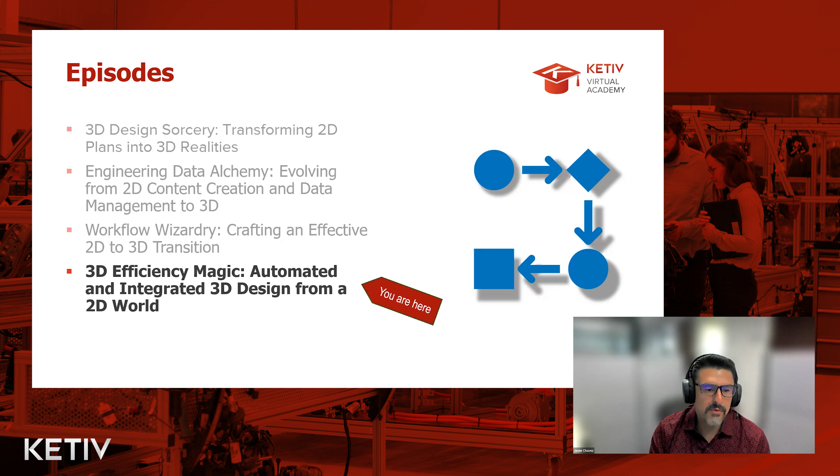So with that said, I'll just review a little bit of what we've covered. The first part was all preparation, a high level overview. In the second video, I think we talked about how you're going to go about planning and creating your content. In the third one that I delivered, I introduced you to some workflows on leveraging 2D data, as well as bringing in static 3D data from STEP files from other sources and making sure that they're usable. And we also talked about, if you do have to start from scratch, what are some resources to create models and 3D data from scratch.

So this last session, we want to make sure that we connect the dots and start to really leverage this, because honestly, the first 3 components of this are a huge investment in time to get up and running.

And you really want to see a return on that. And you can see a return on that, just by some of the information you can glean from a 3D model. But I think you can glean a lot more or get a lot more from this last component where we automate and integrate into other systems.

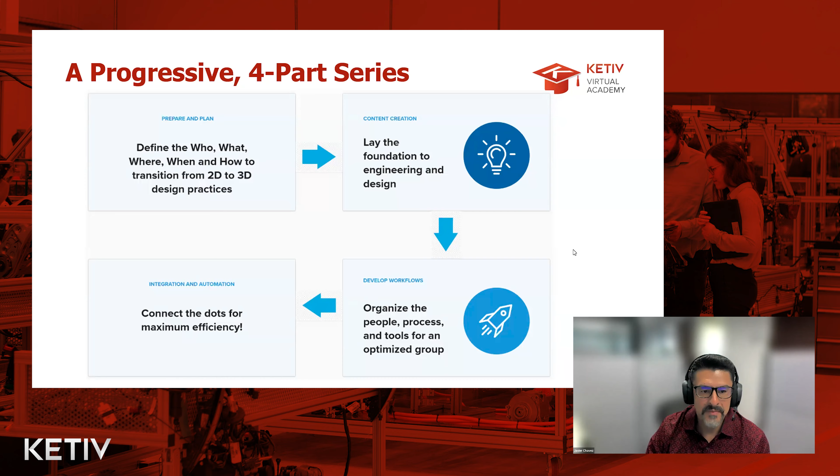So you can see the agenda here. We're going to start off talking about design automation. I want to bring up an example, and we're not going to go from beginning to end in terms of creating or programming any iLogic, et cetera. But I am going to give you some really good resources and give you a live demonstration on what that looks like. And of course, again, with those resources, you'll see how you can get started.

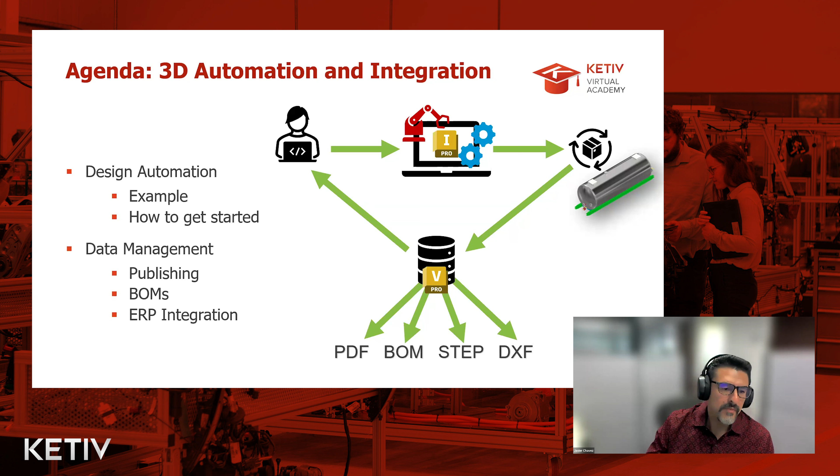But the other part of this is how 3D integrates, I think, better with data management. You can certainly work with data management in a 2D environment, but you can get so much more information and you can do a bit more with that 3D data than you can the 2D. Okay, so that's one of the reasons we go to it, so that we can manage our data better. And so with that said, let's get into our design automation example.

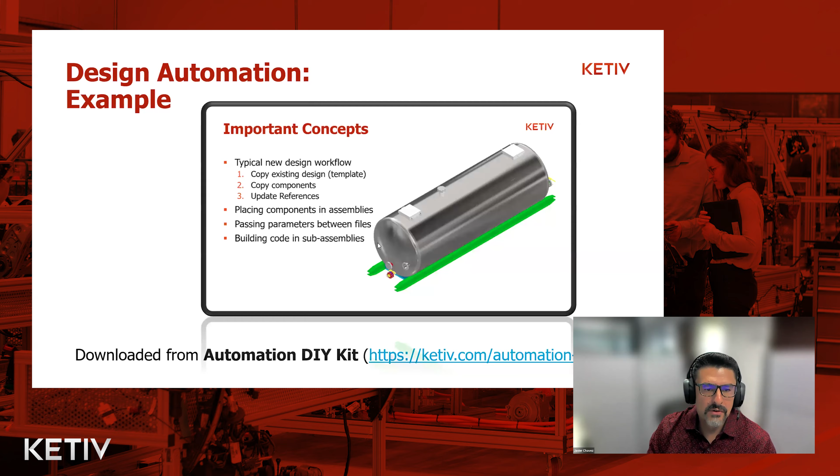So this is what you're going to see. And before we get into this design automation example, let's take a look at just some of the information in it, right? So in this case, we're doing an assembly only, right? And we want to create a new assembly. And the typical workflow that we're trying to automate is going through the process of having sort of a templatized tank here, right? There's a number of components present in this configuration,

but we also want to configure it in the process and borrow things that are standard, that are static, that don't change, maybe in a library folder, and then also copy components that are going to get changed, modified, lengthened. The diameters are going to change, or maybe they're simply going to be turned off. We want to copy those. And when we do that in an assembly, we want to update the reference so that we have one unique assembly with certain things that are standardized, that are borrowed and used over and over again, and other things that are changed, right? That are swapped out.

So it does cover these concepts that you see here. Passing information back and forth between the files through iLogic, as well as through Excel spreadsheets, and building code in subassemblies. That's what this data set covers. Again, we are not going to be able to go through every component of this, but we have some pre-recorded information that you can use, and it's got a ton of detail.

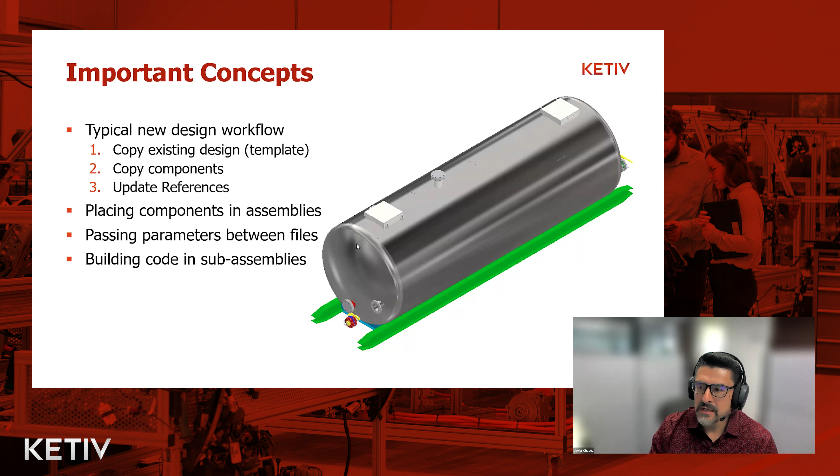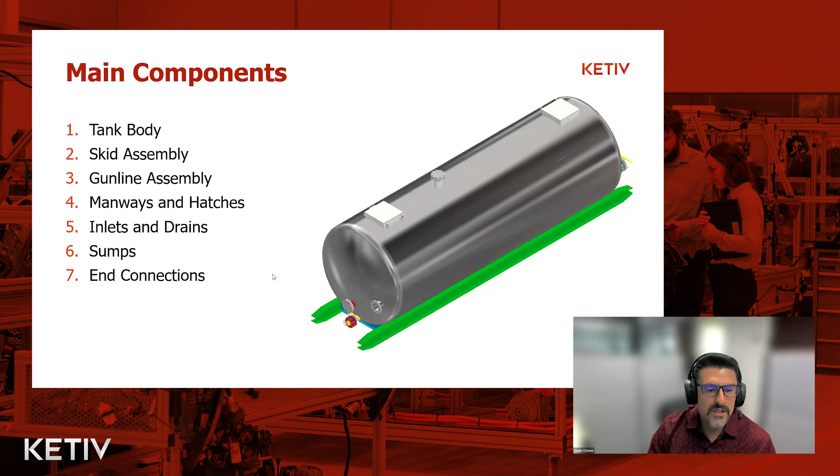So with that said, let's go ahead and take a peek at what this assembly is composed of. We've got a tank body, skid assembly. There's a number of components there. Each one of these has some unique variables or rules in regards to them, right? And again, we go into a bit more detail in some of the videos that we'll distribute out to you. But the tank body has two main components, like the ends or the heads, if you will, the dish heads, and the individual shell pieces that get copied along the length.

So there are individual shell pieces that get copied and welded together here. So there's a number of pieces there. And of course, we want to control the diameter of that. So we want to do this in 6-inch increments, and we want to also control the lengths in 6-inch increments all the way from 36 to 600. So what we've done here is we've captured the rules, right? The logic. So we're not just copying things like I maybe showed in the previous slide a moment ago. We're also adding logic to this. These are some of the rules just for the tank body.

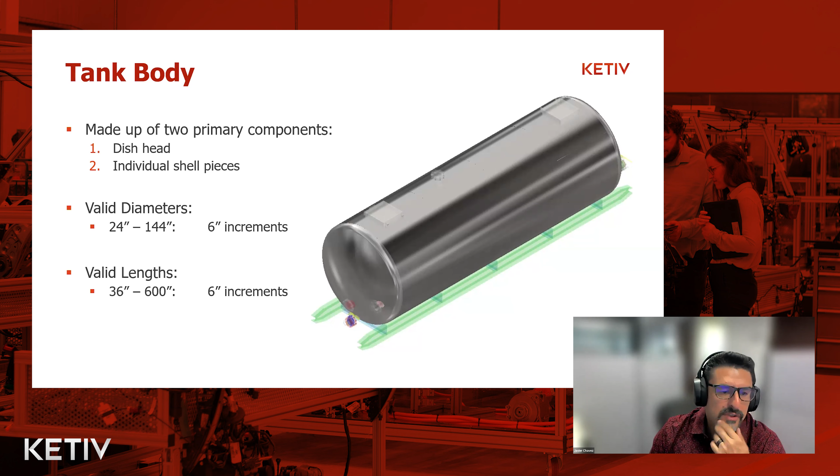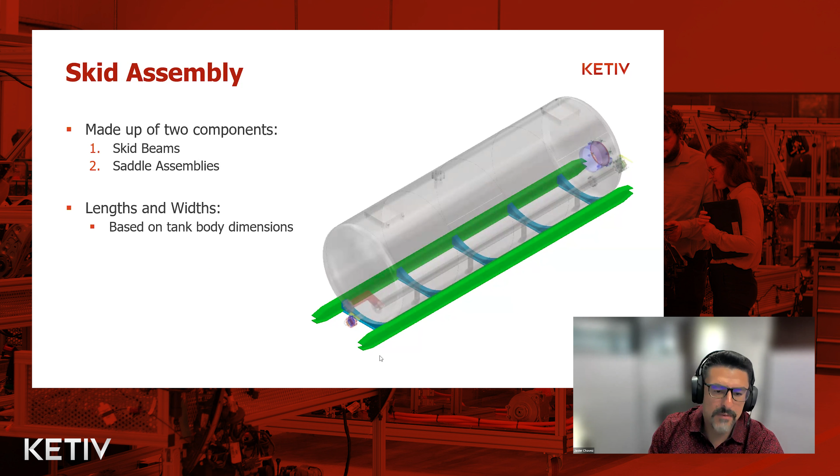And if we move on to the skid assembly, you can see, again, it's made up of a couple components, and it's completely based on the tank dimensions. So the diameter and the overall length determine what this skid assembly is going to look like. If we move on, there is an optional gun line assembly.

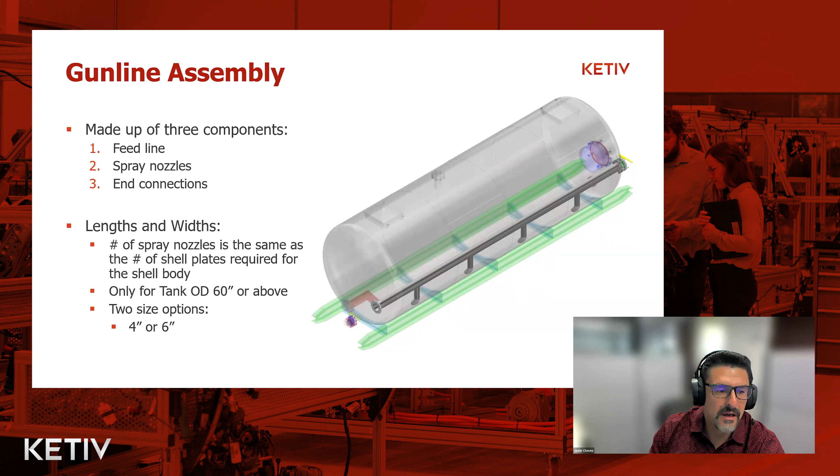You can see it kind of highlighted here. It's kind of a manifold where you might inject other chemicals into the tank itself. And there's some dependencies there as well. So as an example, this is only available for tanks that are 60 inches in diameter or above, right? There's only two options, and the number of spray nozzles coincides with the number of shell plates. So if there's 1, 2, 3, 4 shell plates, you're going to get that many nozzles.

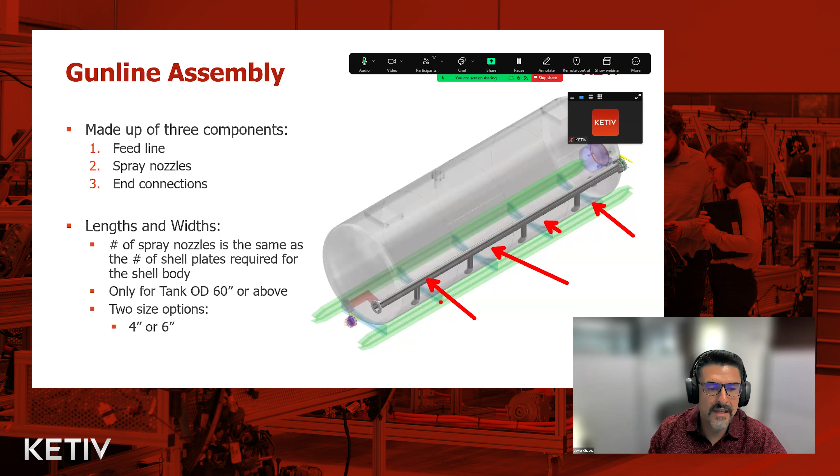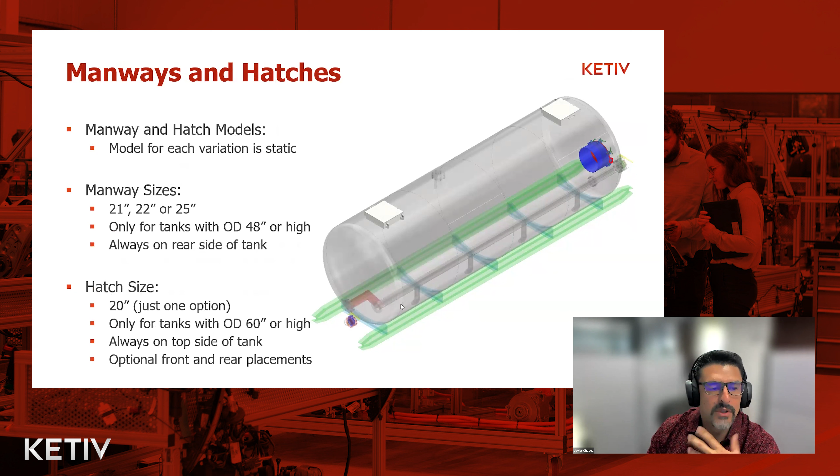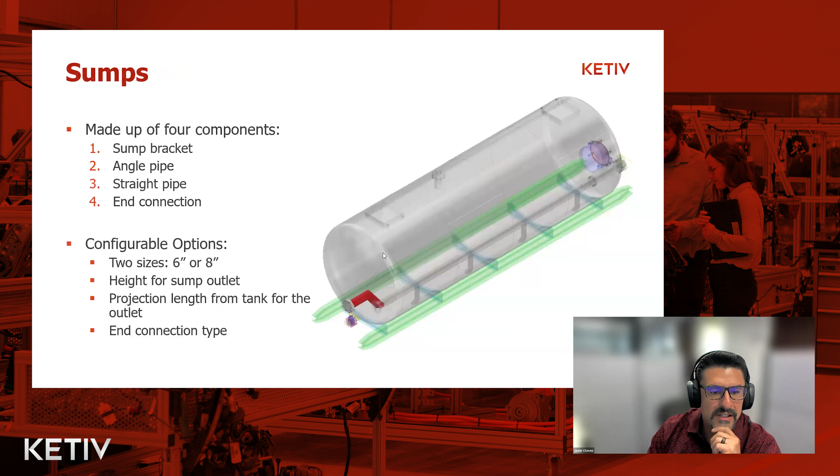Okay, so a lot of rules here, and we want to just highlight that throughout the data set, you can get a copy of this PowerPoint to see what's the point or what's the limitations on some of these components, to see what the idea was behind the automation. And so in just a moment here, I'll go ahead and open it up, but you can see we identified all the little nuances of the components that are in here.

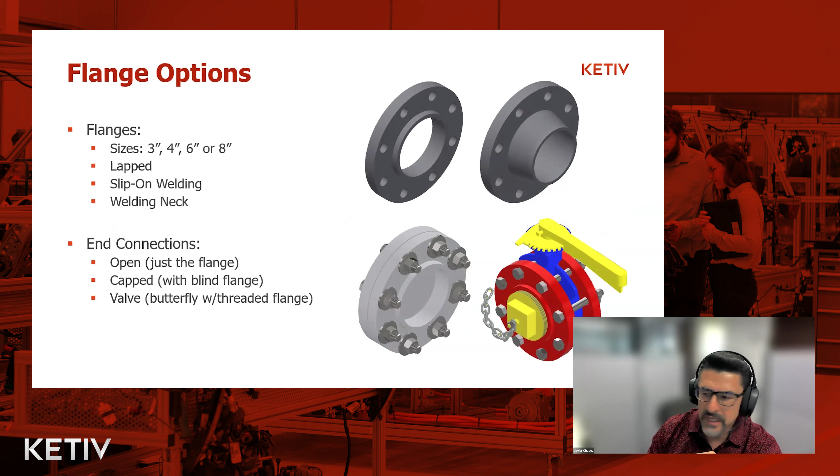So again, I'm not going to read everything here. I'm going to basically start opening this up, and we'll go ahead and show you what this looks like. So with that said, let's go ahead and take a look at the actual assembly. Okay, so this is a finished version of this. And before I actually open this up and launch it, let's take a look at what comes in the download or the kit. Right, so you can download this kit.

It comes with the documentation. There's code there that you can copy and paste for a number of things. It comes with a number of resources here for identifying what the point is of this data set. And they're super good resources, right? There's a lot of documentation there that you can leverage. You'll also see a number of files here and Inventor files to start off with, where you could start working on this and using it right away, and even modifying it.

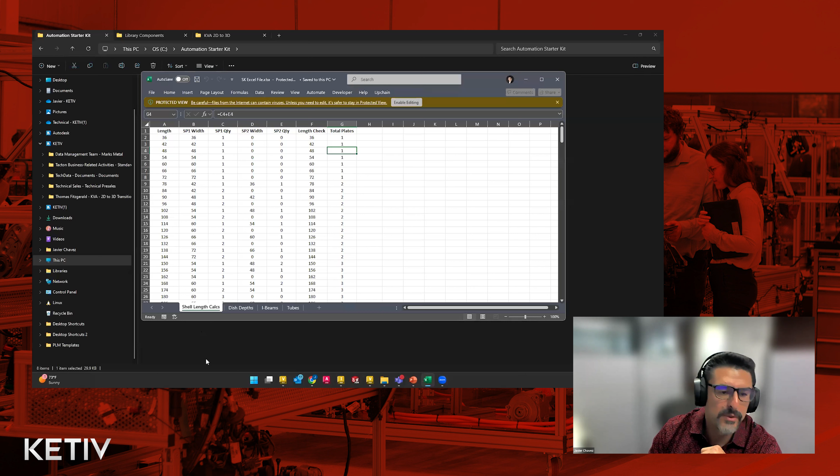So some of this information comes from Excel. So if I open this up, some of the information for these components comes from Excel, and you can see if the length is 48, then other parameters are going to change accordingly, right? We could do this inside of Inventor, or we can bring it in from Excel, wherever it makes sense to bring this from. And again, there's different tabs that control different things. So if the tank diameter is this, then the dish depth is going to be this, and we can extract that kind of information. So that is all there present.

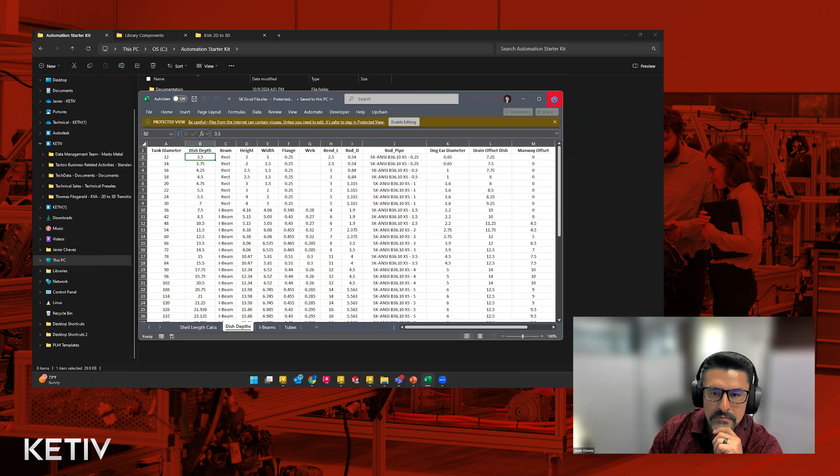And for right now, I think I'll just come back to the actual example and just kind of show you how this works. So this is a finished example. Let's go and create a new one. And a good use case for this, right, is if you create tanks over and over again, we want to sort of streamline the process and standardize it as well, right?

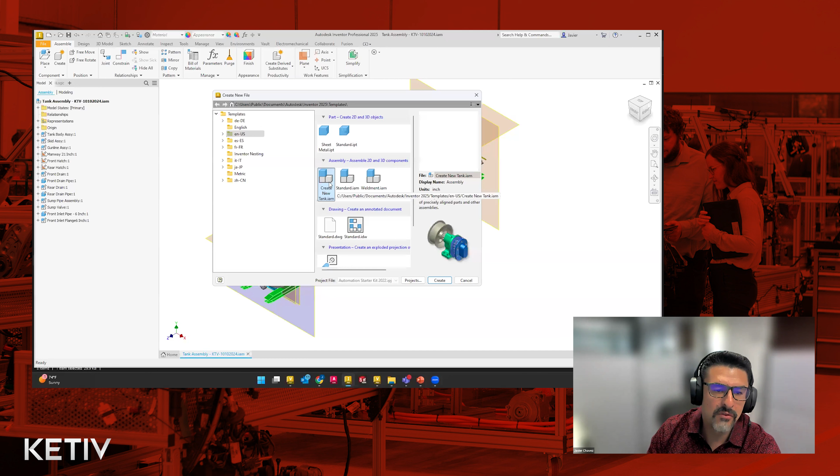I've got a template here, and the data set or the exercise that we're going to send you to doesn't necessarily put it here in the template folder for you to start off with, but it's very similar, and it's a good way to standardize this and distribute it to everybody so that they can start off with a standardized assembly. So if I create a brand new tank, as soon as I create it, right, I get prompted with information. So one of the goals here is to basically organize the files that you're going to create as a result of this into a set of logical folders.

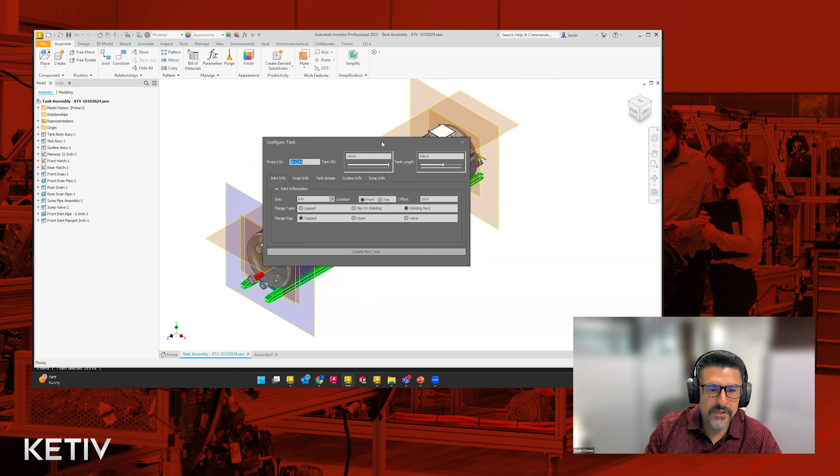So if I were to look at my previous example, just put this away for a second, you can see here, this assembly name is KTV, and it's got a serialized number after this. And so one of the results that we get after using this is basically a set of folders here. So if I look in where this got created, it created the folder where the files are going to reside. It also named some of the components accordingly. So there's the assembly. It names it according to what's in that dialog box. Some of these components are unique to that assembly. So you can see it adds a suffix here with that same serialized number.

And then other components are shared. So if I go back and I look at the folder structure, there's a library folder. These are shared, they're read-only, or they should be anyways, and they're standardized. So you either use these valves, right, or you don't, right? And you're not allowed to change them, right? You just choose between some of these valves.

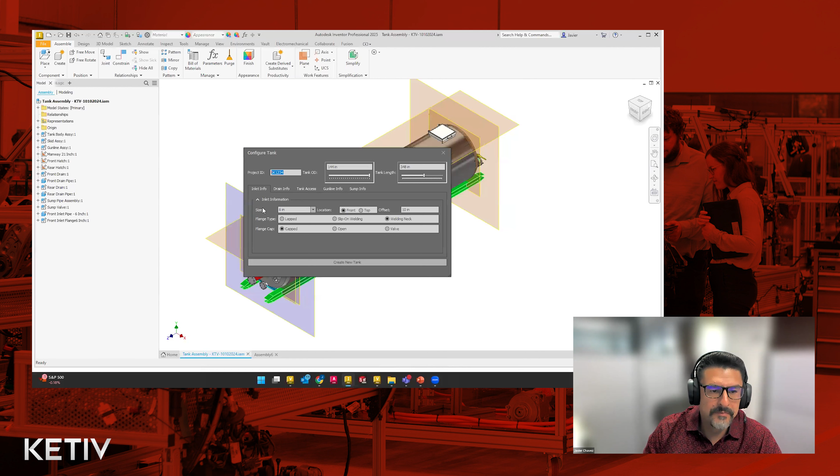So to go back to my model, and specifically the assembly I just started creating. There's nothing in the background here. I'm going to put a project ID, and in this case, I'm going to put KTV here, and maybe a serialized number like 1, 2, 3, 4, 5.

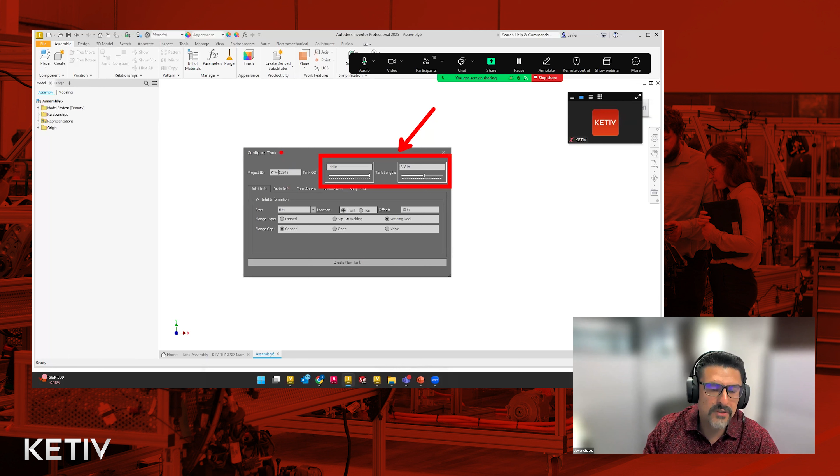Okay, and then I'm prompted with some of the information we just talked about. The most important part is this here—this is an iLogic dialog box that you don't normally see in Inventor. That's specific to configuring and designing tanks.

This is where our slider resides to specify, in 6-inch increments, what the tank outside diameter is versus the length, also in 6-inch increments. We could simply slide that, but I'm not going to click create just yet—I'm going to make some more choices.

So the inlet—how large is that going to be? This is pulling from a drop-down list inside that spreadsheet. And then we've got choices on whether those are going to have welded-on fittings or lapped fittings, etc. We've got some choices to go through there.

With the drain, we can include or exclude them. Do we want a valve at the end, or do we want it to be capped? We've got these options, and I'm going to leave this one open.

When I get to some of these other options, they're turned off by default. So if I put a check next to this, this is where I can add my manway, and decide from these 3 options—I'm limiting and standardizing how I can do this by just providing 3 options.

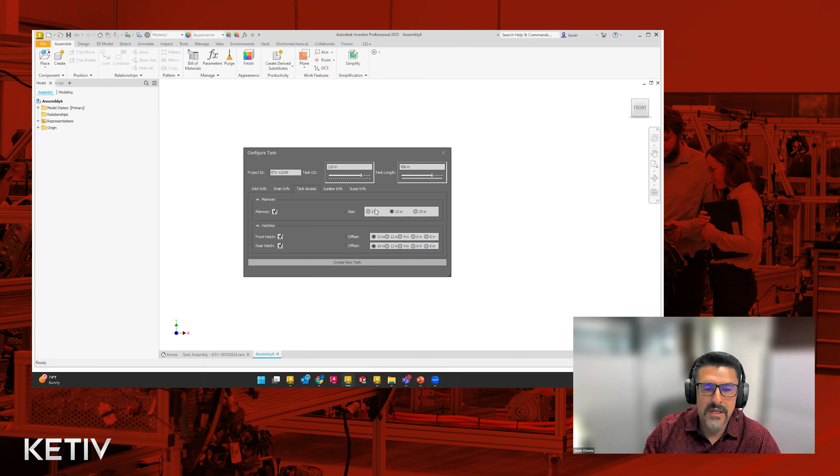So I'll go ahead and put this in the middle option, and put in hatches as well—again optional. Then we can offset them from the ends a certain distance: one offset 8 inches, one offset 10 inches.

Now if I take a look at that gunline information—that sort of manifold we saw earlier—it's available now, but not if the diameter is less than a certain number. If I bring this down below 60, that's no longer available, and I cannot put a check next to that.

So the whole idea of this is to put in place rules that meet the logic of how you might build a tank, and you're going to want to capture that, document it, and put it into code.

This goes through an exercise of doing that, and you'll see here I'm going to change the diameter so I can maybe add a gunline, and you can see the options there. I'll leave it out for this one.

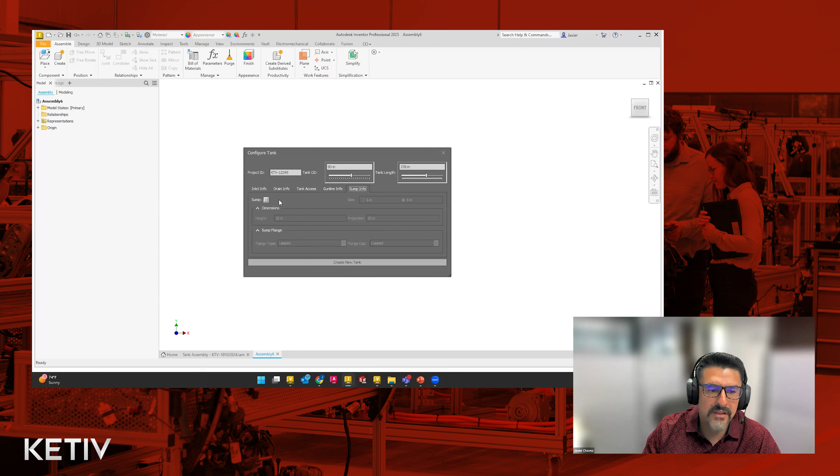And then the last thing I'll do is put in a sump—more geometry that goes on the inside of this. This is for the assembly only, but you could easily add code or automation to also create the drawing. So that's all we're tackling in this example.

And I can go ahead and create this tank. You'll watch it start to generate all the geometry, create new files, and replace components here as we go along. In just a moment, I'll have a brand new assembly.

If you can imagine having to create a number of these fairly often, and constrain them and put them together, this is saving us an immense amount of time. So we now have our assembly here.

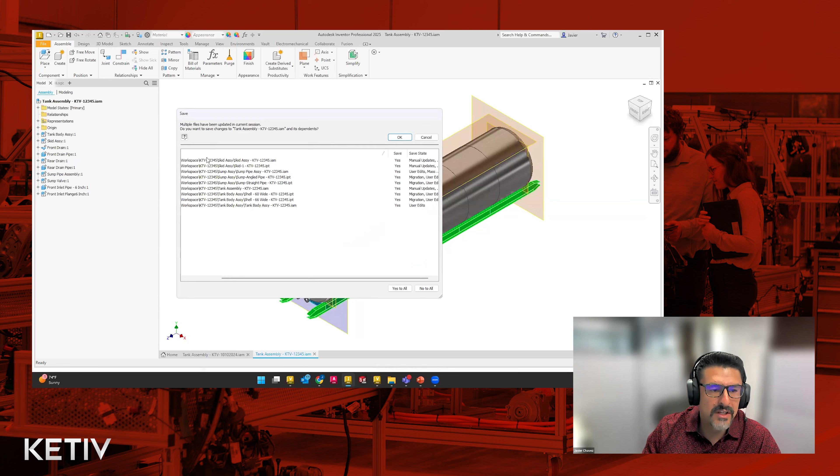There are internal components being created and assembled, and I've got this new version of a tank. If I save it, you can see the naming convention and the folder organization here, and I could go back to Windows here and show you that as well.

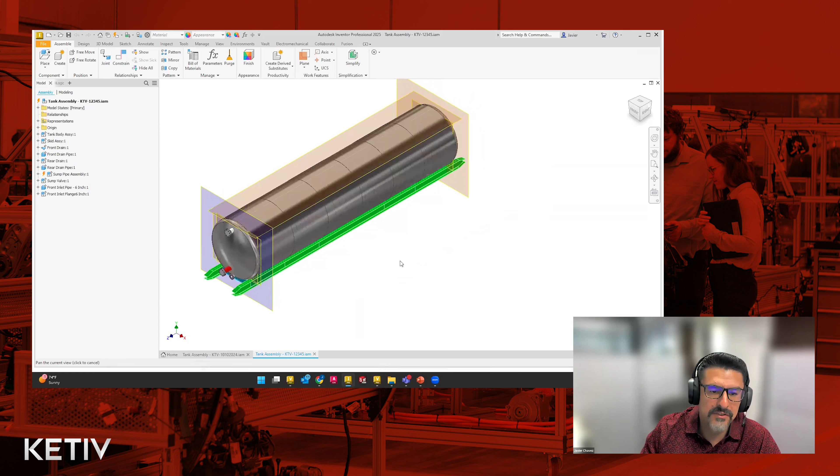It's also organizing the files, and you can see it created a new folder for that project with that serial number or serialized folder number, and all the components are named accordingly with that prefix or suffix. Great example of how this can streamline the process of designing or creating a tank.

I'll come back to my PowerPoint here in just a second, and we got to see a lot of this.

If you want to see a bit more detail and get more step-by-step instructions on this, I'd recommend going to our website and signing up for the DIY automation kit. There is a video that goes along with it, and we'll share those links.

I'll go ahead and click on the link here so you can see it. You will have to enter in some information, no problem, but then you'll be able to download that kit. On the same page, there's a link to watch the video associated with it.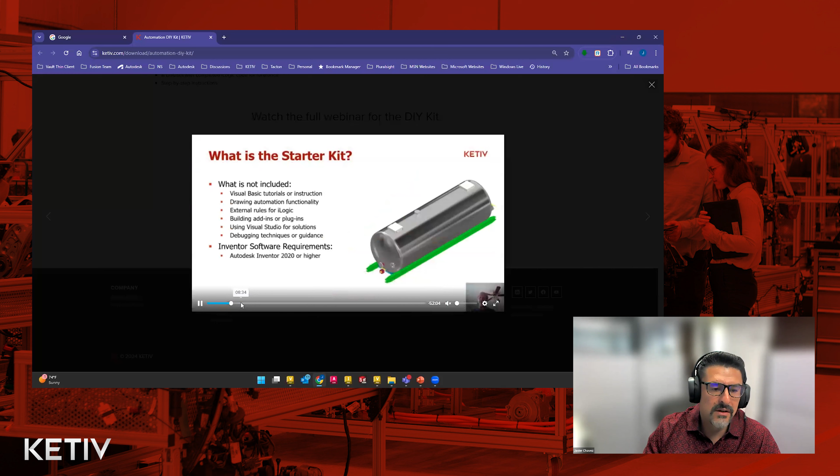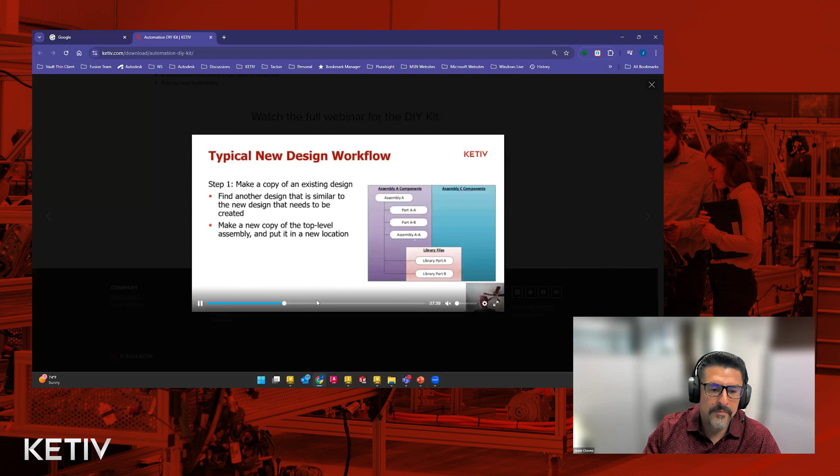When you click on that, it'll take you to a YouTube video that Nathan Eliason put together and presented. It goes through more detail on the idea behind automating this particular tank, the code behind it, and the overall workflow for this design, including things we've talked about in the past.

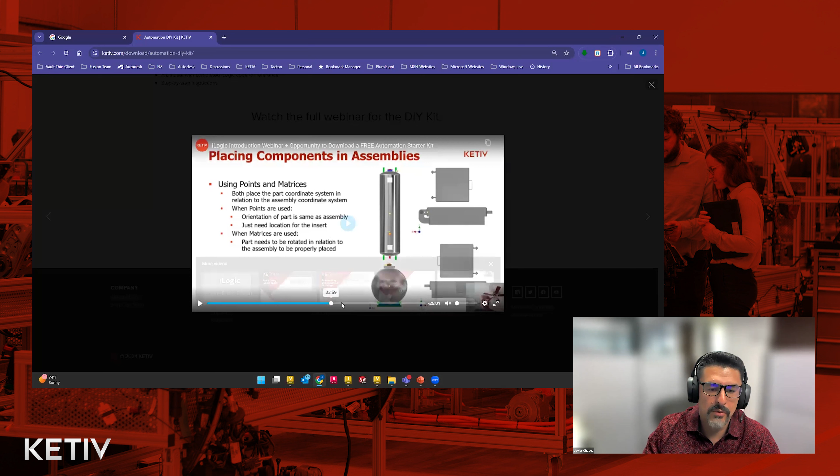How are you going to put origins in your 3D components in order to make them available for automation to quickly place and put in the right location? He goes through quite a bit of that, and a number of methods to do the same thing in different ways, with some advantages.

So I would definitely take a minute to take a look at that, and also download that kit where you can play around with that automation.

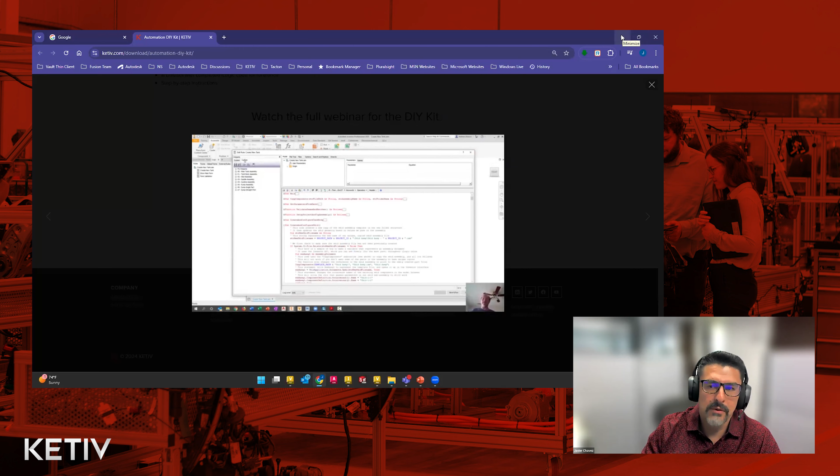Not to mention, if you search our channel, you'll find a ton of information on either iLogic or automation. If you go to our channel, we have a link there, but you want to search right here within the channel, not necessarily at the top. This will search and filter just through the channel to see past videos on iLogic.

There's tons of examples of different types of things you can do with that, because it's so broad and expansive. You definitely want to take a minute to search individual topics within iLogic to get what you need.

With the data management component of this, it's super important because one of the big benefits of having data management in place is revision control. If I come back to this folder, one of the things you're going to be concerned about if you have automation is securing this data.

Specifically, the data you're starting off with. So there's templates here, and this starts off with maybe a skid assembly template, and it renames it and lets you stretch it and change it, etc.

But could you imagine somebody right-clicking and deleting this stuff and suddenly your automation doesn't work? Or somebody opening this geometry, editing it, making changes to it, not realizing it's part of an automation component, and suddenly that automation doesn't work. There's a number of reasons you'd want to control this for production, but in an automation environment, it's super important as well.

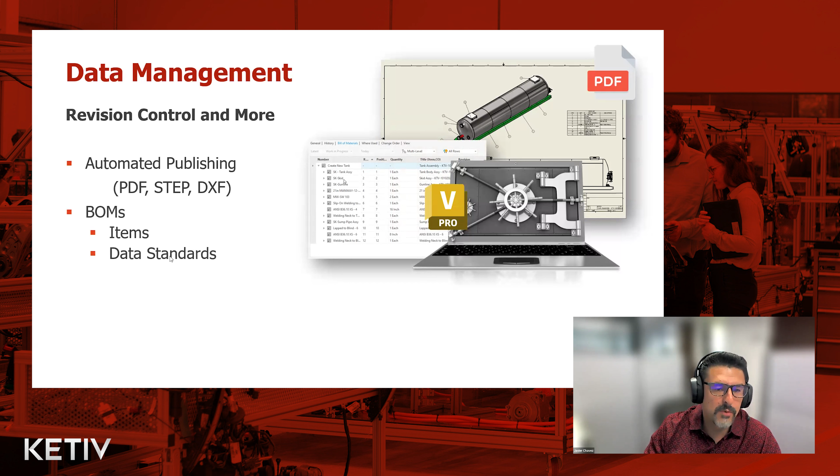We also have access to the bill of material information, and you have access to it through a couple ways. I'll get into Vault here in just a moment.

As I'm bringing it up here, you can see I'm logged in, and one of the things I have here are some of the iLogic data templates, library files that should never be edited, unless somebody's making some planned changes to the automation.

So you could see the dish head here is locked down. You can see that lock next to this, it's released. So if anybody decides to change it, we have history of that just within iLogic, not to mention for production.

And then, of course, the files that got created that are unique for that design get their own folder, their own unique name, and so on. So I purposely went to this design here. This is the design I had open just a little while ago, and with this particular design, I left it in a work in progress because I basically want to show you what some of the results are.

When you release this, we can automate the process of releasing this data and creating PDFs. So if I want to go ahead and release it and call it done, you can see it's picking up the entire assembly. A lot of this is already released, but the drawing has yet to be released. So I'm going to change that drawing at the top here to released, and we can click OK, and that's going to trigger things to happen. You'll see this change to released here.

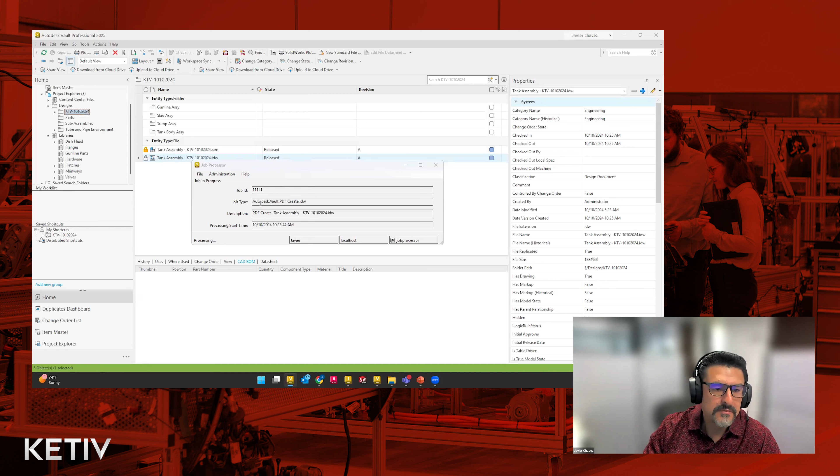So with that said, I'm going to go ahead and open up this job processor. In the background, it's going through the process because we've triggered it through a release process to do things. It's now creating the PDF, and once it's done, that's one less thing a designer or drafter has to go gather or do. It'll simply be there. In a moment, it'll complete. We'll come back to it.

But while it's doing that, let's also take a look at what else we could see. We cannot get a BOM very easily from 2D data. So if I go ahead and select this assembly, the one that got generated from our automation, because it's 3D data, Vault is already recognizing in a CAD BOM tab the components that are there. So there's one of these, there's two of these. We get to see that through Vault, and we can leverage it right away.

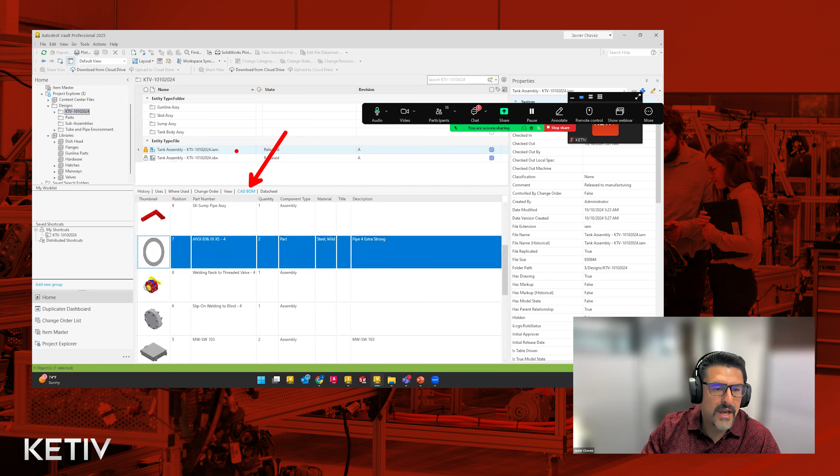If we want to go ahead and do other things with it, we can. This is one way you could do this. This is through data standards that come with Vault, and it's just an add-on there. Once you add it on, it can do a number of things in terms of standardizing how you create data, but one of the things it adds is this CAD BOM data tab. So without having to go to items or use an item workflow, you can see that information. We can extract this information as well and send it to other places.

But here's the other option we have with this. We can use items, and there's a whole list of reasons you might go to items to manage those. But I'm going to go ahead and assign the assembly to items so that we can see these as similar items to what you would see in an ERP system.

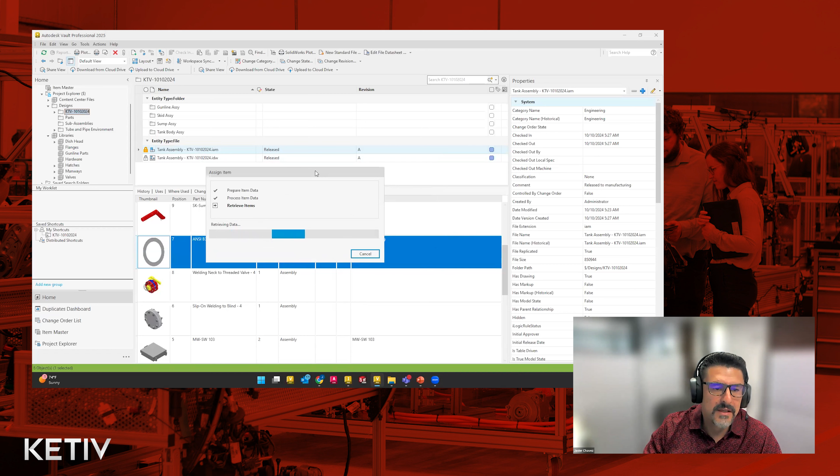So we're doing this at the assembly level, and in the next dialog box where it's completing the assignment of this item, it knows that the assembly is assigned to this. It assigns the item according to a part number or a file name. There's a couple ways it could do that, and then all those things that make this up show up here as a BOM. So this is another way we can manage the BOM, and we could do it directly from here. The big difference is we can add other things and manipulate the BOM from here, add other items, things we don't model like glue, etc.

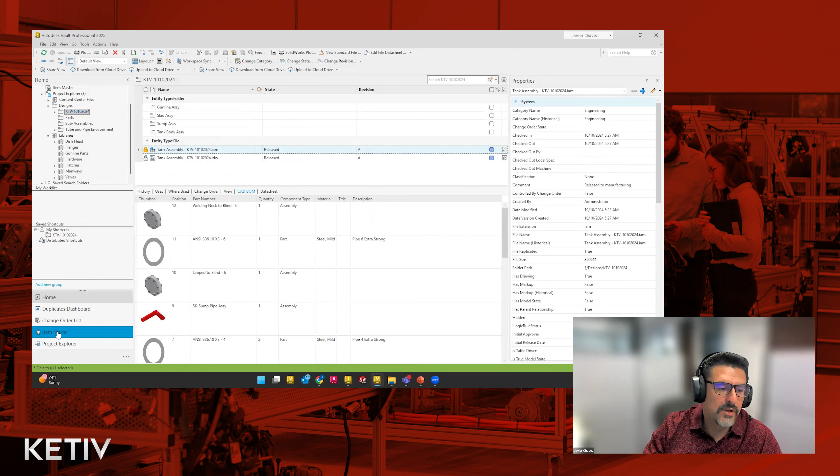So if I save this, we'll have some items there to work with at some point and be able to export to another system. These are readily available to send out to another environment like an ERP environment or manufacturing execution system where we want to work with that. And so if I look at this now in this item environment, this is a big giant list of part numbers, basically. And these part numbers may represent assemblies. They may represent a number of things here.

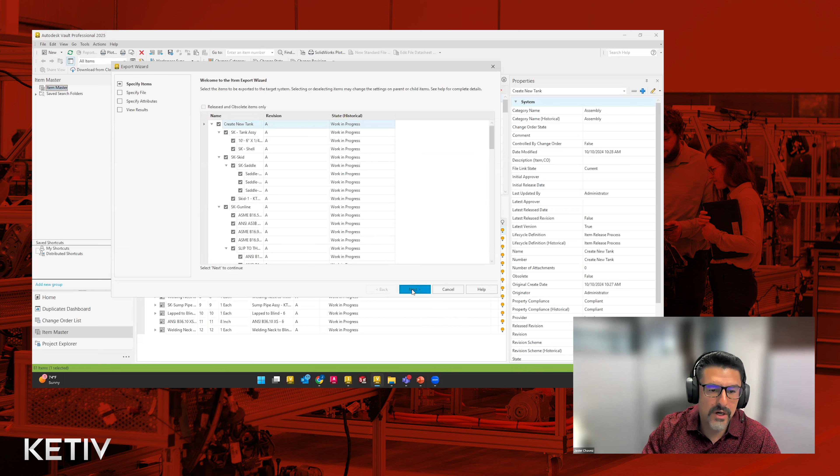In this case, if I look at the tank we just created a moment ago, it's the entire design. It shows the bill of materials. And if I wanted to take this bill of materials and export it out right now for use in an ERP system, I could do it right now. So this lends itself very easily to just creating a CSV file that can be ingested or brought into an ERP system, or manipulated a little bit further in an ERP system. But you can see we can go through this export process and create a CSV file or a TDL or an XML, depending on what format is acceptable. So I'm going to skip that.

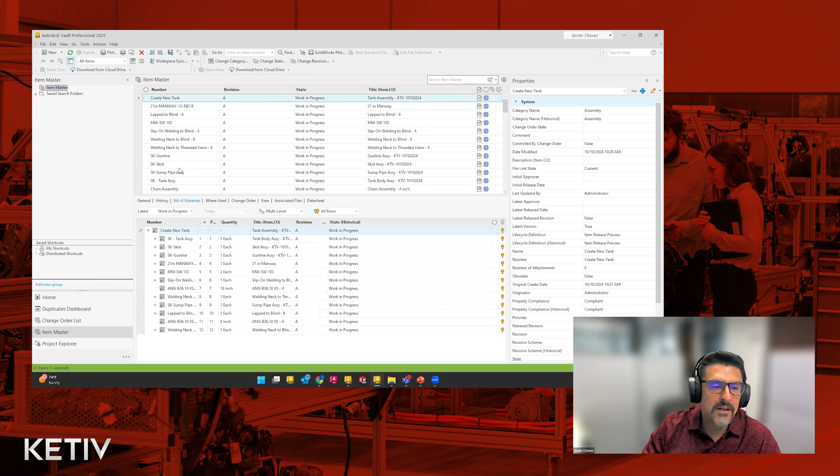For just a moment, because I don't have an ERP system to necessarily show you how that goes in, but it's already integrated. It's already showing you that information. And if I go ahead and minimize this and come back to our presentation here, right?

The other part that really starts to become obvious, right, is how you can use or leverage that BOM data in other places. And you could do it manually the way I started to do it a moment ago. But the best way to do it is to have it automatically triggered by maybe the release process, similar to how the PDFs got generated or the STEP files get generated.

The release process can trigger a process in the background to run and automate the export of that BOM to another system, namely ERP. The last thing we want to do is hand over a sheet of paper or a PDF to somebody who goes through the administrative process of entering new parts, new BOMs, or manipulating them just because they can, make mistakes.

So I've experienced almost all of this, outside of KETIV in the RV industry, and this by far was one of the most productive things we did in that environment: automate our ERP export so that we no longer have to do this manually, right? And so we can support a number of things through our own connector, which is DataBridge, and we can connect to a number of things.

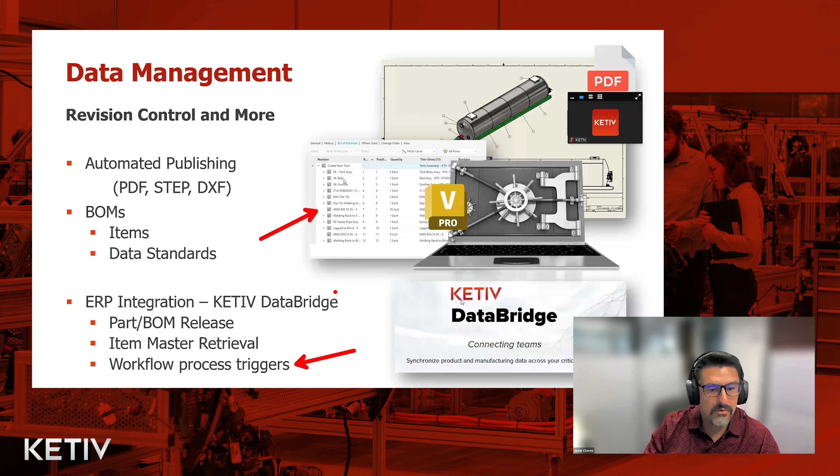Okay. So with that said, I'm going to come back here and just close up in just a moment and just summarize a little bit of what we saw, right? We saw a bit of efficiency through automation. I mean, I can create 10 tanks very quickly, right, via that automation. And they're not 100% done, but they've got, I'd say, 80 to 90% of the work already complete. And that's huge in terms of efficiency, right?